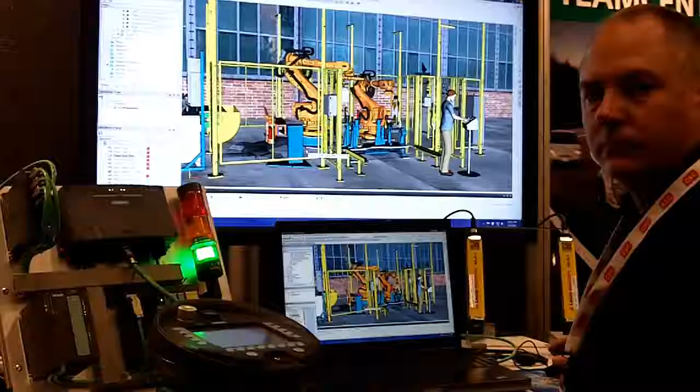So I'm here at PLM Connections in the vendor pavilion with Todd Bengtsson, who is the Director of Manufacturing Business Group responsible for the Americas and the automotive industry. And Todd has a setup showing us virtual commissioning live. Todd, could you go over real quickly what kind of hardware you have there and the software involved?

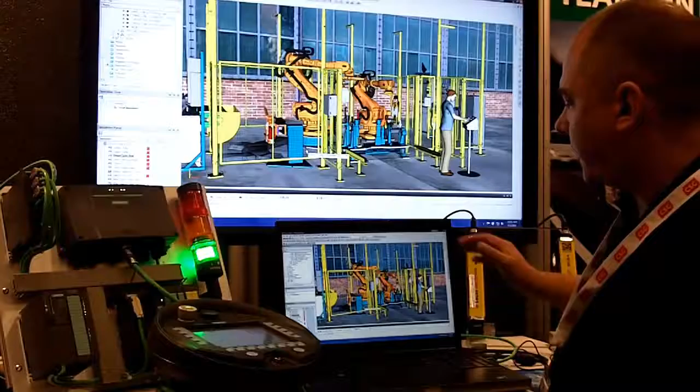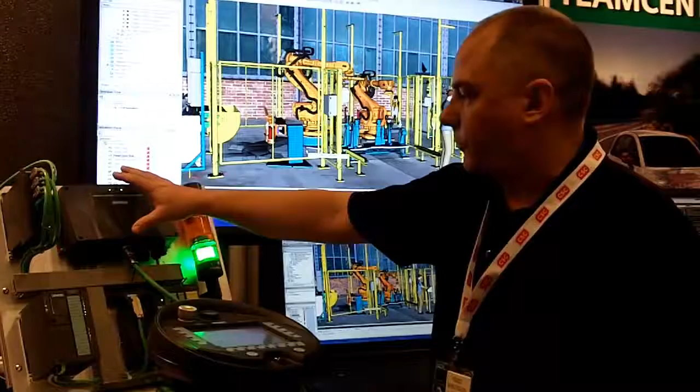Okay, so let me start out. Right here we have Process Simulate from Siemens. This is our virtual environment. Over here on the left side we have a test stand where we have our Profinet, our PLC. We have a portable HMI, some safety modules, and some other hardware that's been integrated. In this case, a stack light, some e-stops, and even over here a virtual light screen, or a physical light screen.

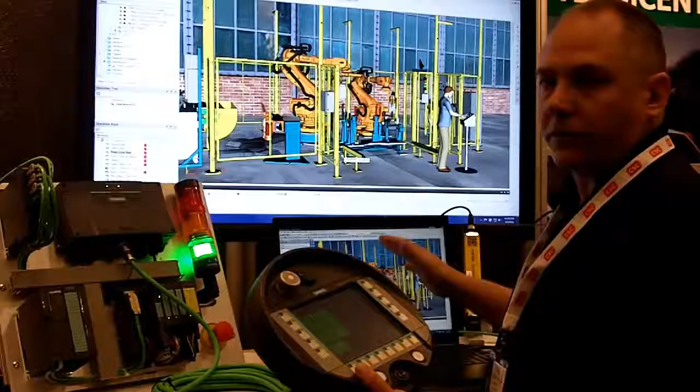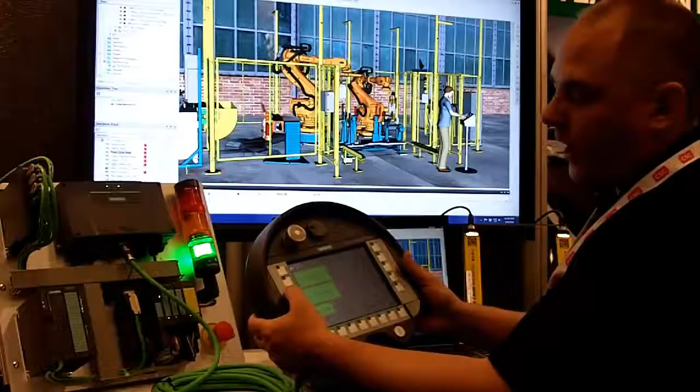So the idea for using this environment is to be able to validate our PLC code, our interlocks, and the physical behavior of our cell prior to the construction of this equipment. So for this demonstration, the first thing I'd like to do is to switch my cell into a manual mode. And while in manual mode, I may want to exercise the tooling or the equipment here in order to run some simple diagnostics. So in this case, I'm going to energize the valve that closes the clamps in the tool.

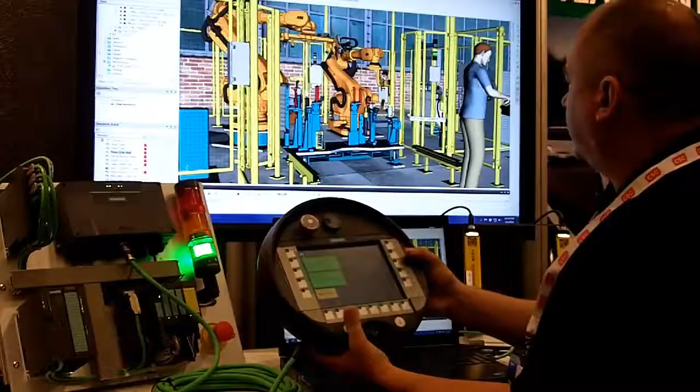I can see that that has occurred. I have the proper message here on my HMI. I'm now going to open the tool, and eventually I can see here that the tool is not ready. Now actuating the second valve, I can now re-extend the pins and see that the tool is ready. Therefore, the proper information is being presented to the operator, just as he or she would see it on the floor during production. So now we'll switch to automatic mode.

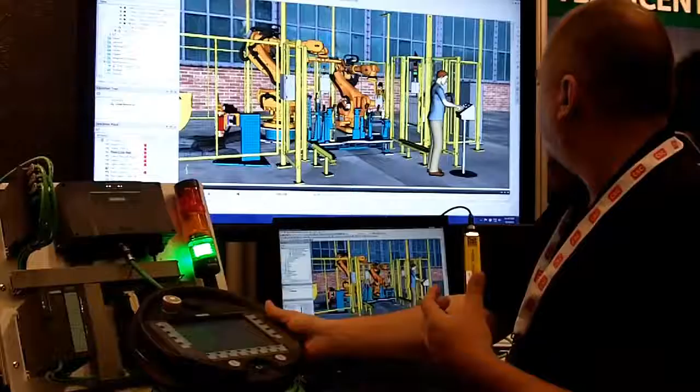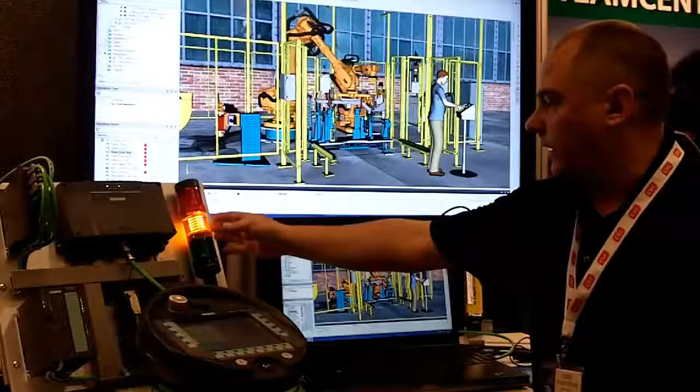While in automatic mode, I want to test several things about the cell. We'll back out here. So as the operator, my first job would be to load a part into the fixture. In this case, we can see that the part is now present in the fixture. And now I'm being prompted to press cycle start. So I press cycle start, the robot cycle begins, the tool is now in automatic, indicating to me a yellow light here. As the robot clears the fixture, the stack light changes to green. It's now safe for me to re-enter the cell and approach the fixture.

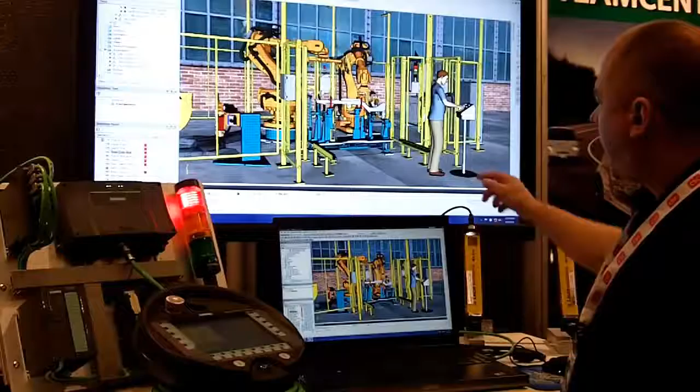So to continue on, I'd like to also test the safety interlocks, the things that protect the operator from the automation. So we'll do the same thing again, loading an additional part, pressing cycle start, and as soon as the robot cycle starts, as the operator, if I were to walk in, reaching this light screen here, I can see immediately that I have an e-stop. On my HMI, it's presenting me with a message that there is a screen fault. So I would have to clear the area and then go back to my HMI, press restart, and the cycle would continue.

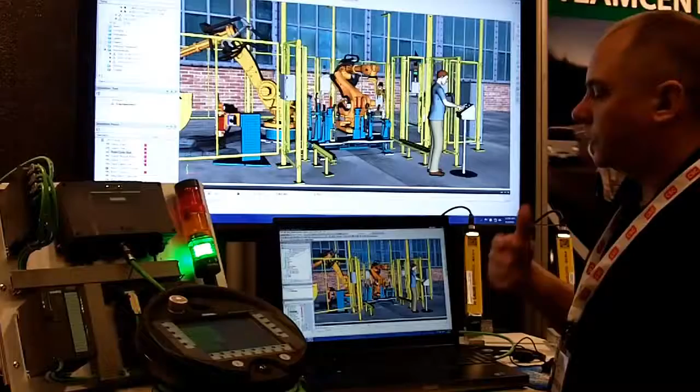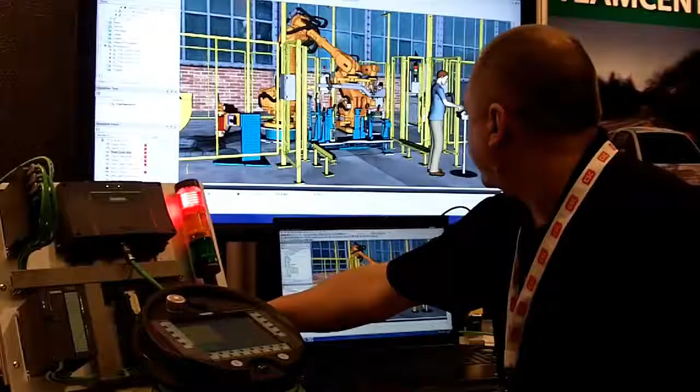We'll look at one additional scenario here. So picking up on the same idea here, we'll load the part, start the cycle the second time, and once again as the robot begins to run, we may notice something's wrong, so we would select the e-stop somewhere potentially on the pedestal stand here, which once again sends the robots into an e-stop. Safe condition for me to approach the fixture, examine potentially what's wrong. After this has occurred, I can exit the cell, reset the e-stop, and continue once again with the cycle.

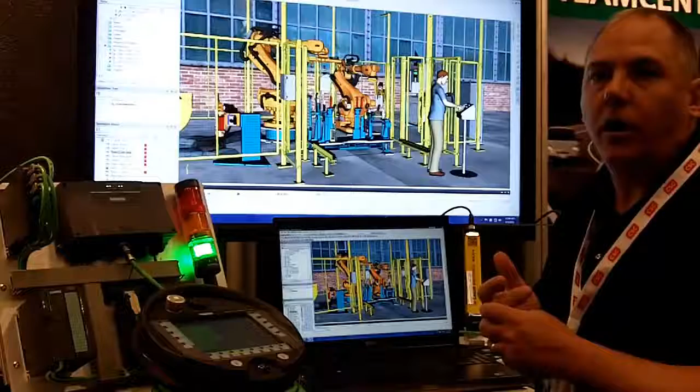The key value behind doing this is that we're doing it virtually, all prior to production. If we were doing this troubleshooting or debug during a launch cycle, we're directly impacting our ability to reach production potential. So by doing this validation in parallel to the construction of the tool, we basically mask any of this time, therefore saving us time during launch. Excellent. You know, I've heard customers have improved their commissioning time on the shop floor upwards of 80%.

Yeah, considering the complexity of today's cells, that makes a lot of sense. It's not a single part running through a single fixture. We have multiple styles, we have many sensors, we have complex robot programs, so trying to debug this on the floor with the crunch of production looming is a very daunting task for many suppliers. So it's not surprising to hear how important and how much value this particular environment and solution can be to our customers. Absolutely.